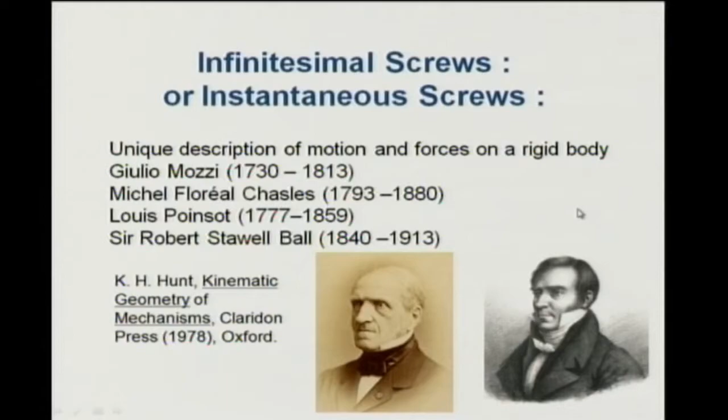So then you can go and find out who these people are. These are very interesting people. They are there in Wikipedia, so you'll read up more on them. They have tremendous contributions to mathematics, including Chasles. All of them, in fact.

You must have heard about Chasles before, right? No? Oh, yeah, earlier lecture. Other than that, in some other course? What did you do in 110? We studied his theorem about 3-dimensional motion, which can be represented as a sum of translation and rotation. Achha, sum of translation and rotation. But they didn't tell you it's about the same axis? No? Oh, that's a loss. But anyway, he lived very long, and he had tremendous contributions.

So now coming back to a line in the plane. You take point 1 somewhere here, point 2 somewhere here, and you have a line going from 1 to 2. So this is a directed line. The component in the x direction, I am calling it L. It's simply x2 minus x1, which can be represented through this determinant. The component in the y direction is y2 minus y1, represented by this determinant. This is just a representation.

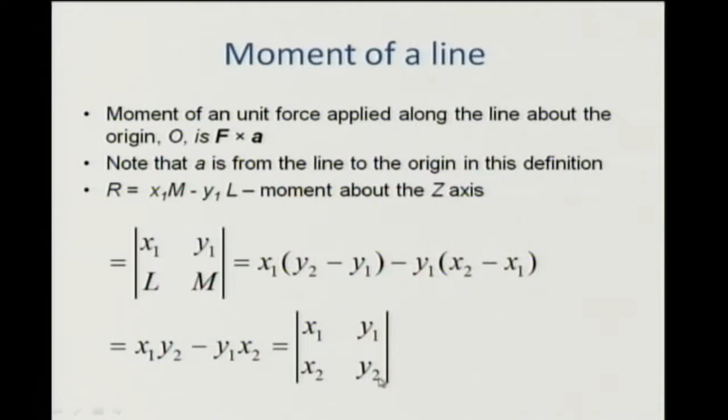So finally, if I now look at this matrix, which is 1 x1, y1, 1 x2, y2. From this I can form three determinants. One is 1 1 x1 x2, which gives me L. I can form 1 y1 1 y2, which gives me M, and then if I take x1 y1 x2 y2, I get R. Okay. So these L, M and R are the coordinates of a line in the plane.

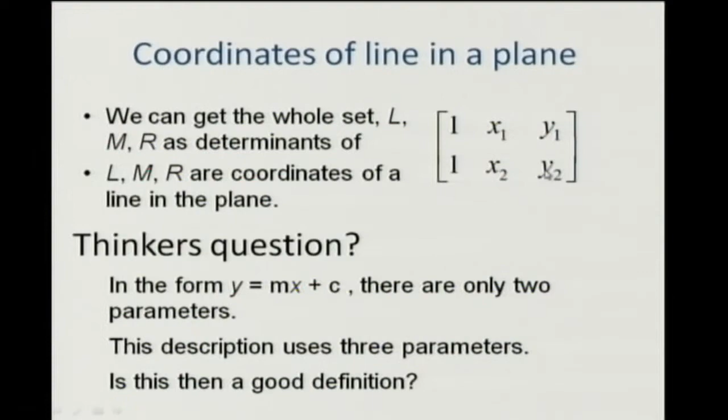Okay. So now what have I achieved? Because if you want to define a line in the plane, the commonest form that you are familiar with is y is equal to mx plus c, right. How many parameters are there? Just two parameters. In this description that I am now giving you, there are three parameters. It's a stupid thing to do, right. But y equals mx plus c was known before. So why am I interested in doing this? Now that's a question which should come to you. If it hasn't come to you, you are not thinking. We will not answer the question now, we will answer it later.

So I want to extend it to 3D. It's very simple, it is 1 x1 y1 z1, 1 x2 y2 z2. How many determinants can I form now? 6, right. How do you get 6? 4C2. So you can form 6 of them. So there are 6 parameters. We've already seen L, M and R. So we define N, P and Q. Okay.

And so you define N like this, and then Q, and then P. And this is an interesting definition. Here you are not using 2 points. This one uses 2 points, right? z1 x1, z2 x2. But this one is z, x and L. So you need only 1 point on the line and just these 2 parameters to define Q. And similarly here, y, z, M and N. So this gives you a 6 parameter definition of a line in space.

What is the equation of a line in space you knew earlier? x by a is equal to y by b is equal to z by c is equal to constant. Plus D equal to 0. How many parameters? 4. Here we have 6 parameters. Not good. So we will see what happens. And so we are looking at this second set of definitions. For any point x, y, z on the line, instead of specific points on the line.

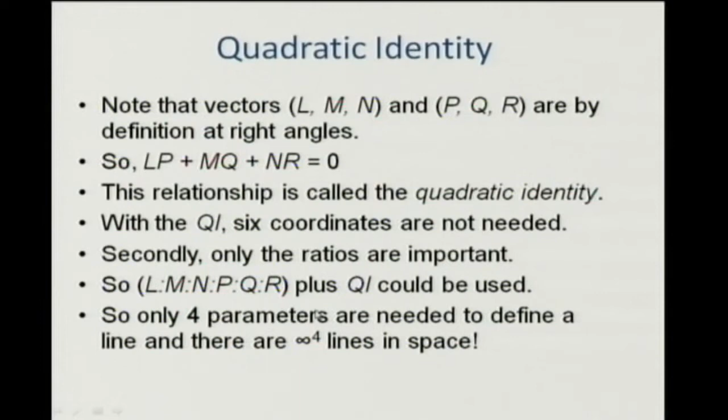And so this is where this thing comes in handy. So you start with the plane z is equal to 0. You could take any plane and do a coordinate transformation and rewrite it, but for simplicity we will start with the plane z is equal to 0. So you take Tx plus Uy plus S is equal to 0, where x and y are the points on the plane. So this defines the full plane.

So what we then do is we scale x and y, we divide by w. I can do scaling because I have this plane here. I can draw a coordinate system and describe all these points in that coordinate system. I can just change the scale of the coordinate system. I still have the same plane. So any point which I had earlier, I will rescale. So I get this formula. Now if I just multiply it by w, I get Tx plus Uy plus Sw equal to 0.

Now this is called homogeneous because all of them have 2 terms. This was not homogeneous. This had 2 terms, this had a single term. So this was a funny equation, this is a regular equation. All your life you have learned the funny equation, but not the regular equation. This regular equation you had to wait for people like Poinsot and Mozzi to figure out.

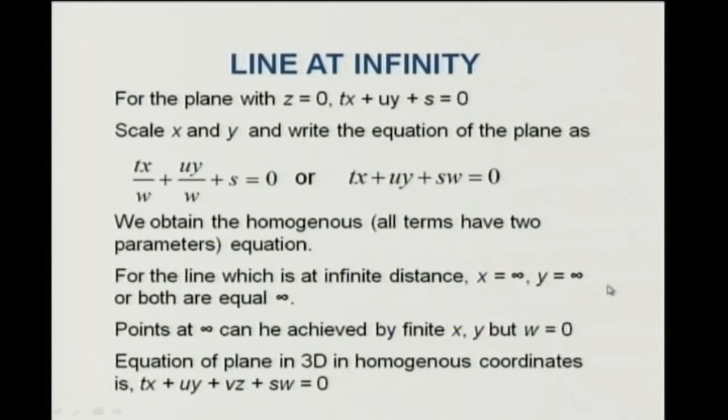So similarly, we take the equation for a plane in 3D homogeneous coordinates, and it becomes Tx plus Uy plus Vz plus Sw equal to 0. So everything has two terms, and you get the equation of the plane in homogeneous coordinates. This represents all points x, y, z, w in a given plane T, U, V, S. So this is a general plane, 3 parameters, or it represents all planes T, U, V, S passing through a given point x, y, z, w.

So the same equation represents two things. This is what is called geometric duality or geometric incidence. And similarly, the join of 2 points, intersection of 2 planes concept that we keep talking about for the line. So we are talking about a plane and a line. Similarly, if we take 2 points, you can again define a line, and that is again geometric duality or incidence.

So if you get w equal to 0, it implies that you have a plane at infinity. So you get points at infinity and planes at infinity all coming through that, and then you can multiply by a constant non-zero scalar and end up in the same plane. So there is no change in the plane. Multiply by any constant scalar, it does not make a difference, you are still in the same plane. Now here is the interesting thing: if it does not make a difference, that is why you keep w by definition equal to 1 unless you want the point at infinity.

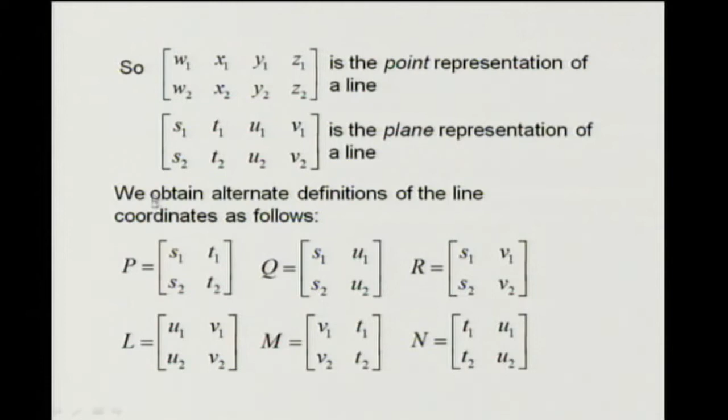Okay. So which are again the same matrices from S1 T1, S1 U1, SV, and then similarly U1 V1. It is very similar, except that these orders are reversed. L, M, N, P, Q, R are called the Plucker coordinates; this is called the ray coordinate order, which is basically a join of 2 points, so there is a sense of direction. And then there is axis coordinate order, which is the intersection of 2 planes which gives you an axis. It does not give you a ray, it is not directed, and that is P, Q, R, L, M and N.

Okay. And finally, if the line is not at infinity, W is usually taken as 1. For the line at infinity, we said W is equal to 0. So the whole matrix becomes this form. For W equal to 0, L, M and N are definitely equal to 0, but P, Q and R are not necessarily equal to 0. So we have a moment of a 0 force. It's an interesting concept, because we started by defining that if I have a line and I take a moment, now we have 0 force but a finite moment.

Possible? In statics? Come on, you have seen this, right? It's called a pure couple. It's not so bad, right? A couple has 0 force but a finite moment. But in general, if you apply a force, then about a point it will have moment and a force. So it is not so unusual. Okay. So what will slowly come through is that you can have 0 force but a finite moment, and that is essentially something at infinity, a line at infinity. Okay.

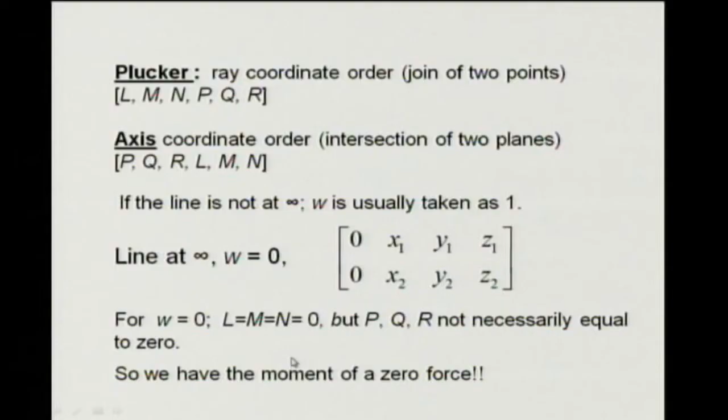So similarly, if you are rotating about a line at infinity, then you get pure translation velocity, so that is like a sliding joint. Now this is something which you have already done in the kinematics course. Yes, no? This you must have done. If you say no, then you should have flunked the basic kinematics course, right? If you have a rotation axis at infinity, you get a sliding joint. So this is the same representation of that.

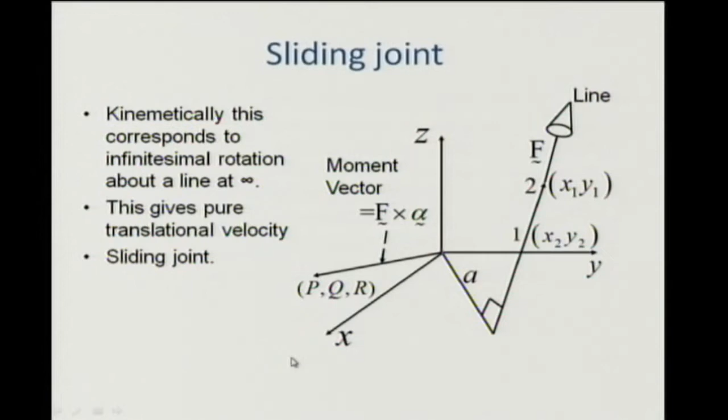Yeah? You remember? Or don't remember? Remember, vaguely.

So now one of the problems which you struggle with is that you always keep talking about force and a moment about a point. So you talk about a pair. Now if you write it in the form of a screw, then you get a unique description. It doesn't matter which point you are referring to, it is unique in the coordinate system which is used. So we look at that.

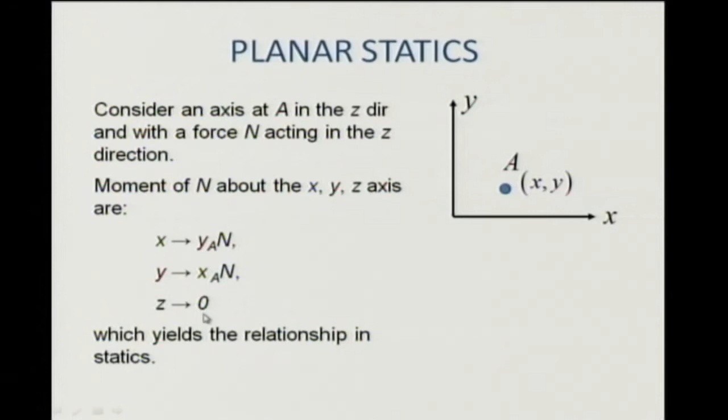Now similarly, if you have a body rotating with angular velocity omega about a point A, and you take a point D which is instantaneously coincident with the origin of the coordinate system. Since this is rotating, there is no point D which always stays at the origin, that is acceptable. The point instantaneously coincident with the origin will keep changing, but I take the point D which is instantaneously there. So the velocity of D is omega cross AD.

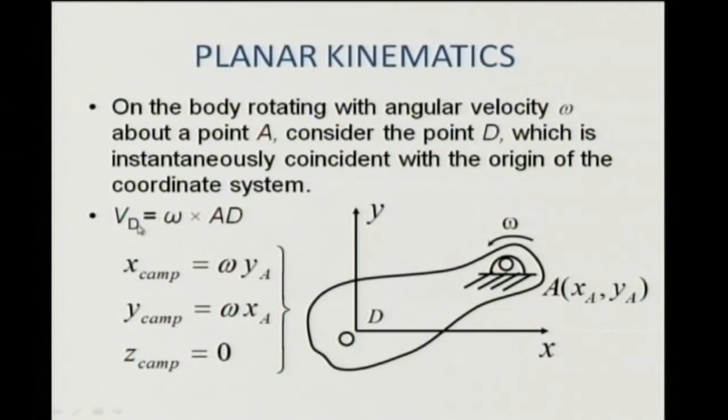So the x component is omega ya, y component is omega xa, and the z component is 0. So these are identical relationships which hold. So we now extend to a slightly bigger thing.

Now we have the general line in space, LMN PQR, and we have a body rotating about it. Now this body, if I look in the extended sense, can extend it and curl around this, and we will have a point on this body which is coincident with the origin. Not a very big stretch, right? You can just imagine if I just draw this like this, it will just clutter up the picture, but it will get me there.

So if I have an omega about this, then the velocity components about a point which is coincident with the origin will have components p, q and r. Okay. And the velocity at any general point x, y, z is p minus this, q minus this, and r minus this matrix. Okay. You should just try proving this. It's not very difficult. It's a little bit of homework.

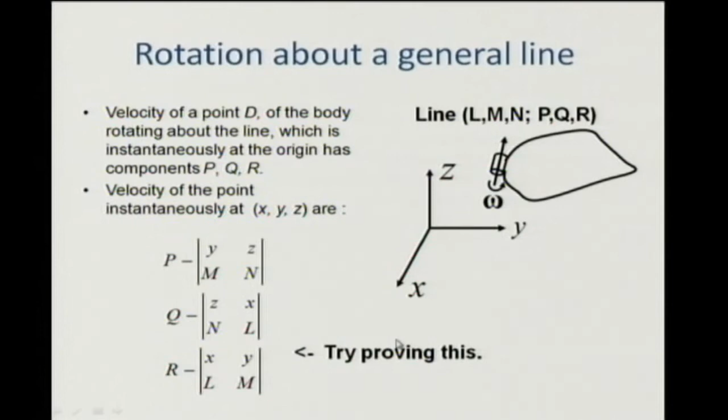Okay. So PQR is for a point which is instantaneously coincident with the origin. If you take a general point, then you get this. You have to add something more to it. Okay, you should be able to prove this very simply. Okay, clear?

So now let's look at other nice properties. Obviously, two lines are parallel if L is to M is to N is the same between the two lines. Okay, and two lines are perpendicular to each other, they need not intersect, but they're perpendicular to each other if L1 L2 plus M1 M2 plus N1 N2 is equal to 0. Okay, very simple. Dot product is equal to 0.

For two lines to intersect, essentially it means that they have zero mutual moment. That means if you apply a force about one and it's free to rotate about the other, then you get a zero moment. So then you get L1P2 plus M1Q2 plus N1R2 plus, so L M N P Q R of the first, and then you write P Q R and then L M N of the second, is equal to 0. So you write one in ray order and the other in axis order and take the dot product and you get this equal to 0. Okay, so this is the zero mutual moment condition.

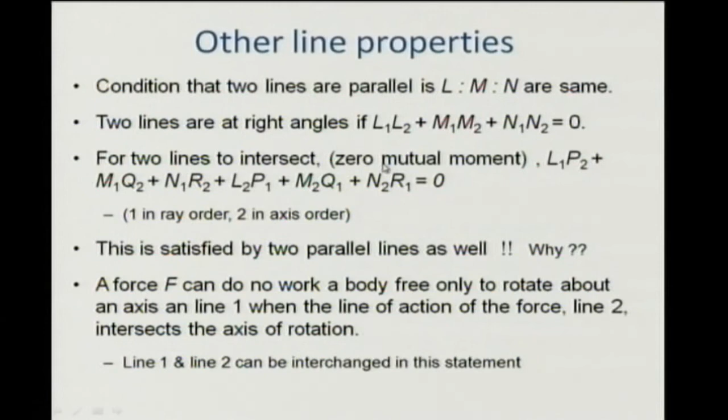We now look at this issue of normalization. So very simply, you divide all coordinates by L square plus M square plus N square raised to the power half. So depending on the distance, p square plus q square plus r square has a value. Now, if L, M, N all are 0, then you divide the coordinates by p square plus q square plus r square raised to the power half.

Okay. Now, angle alpha between two normalized lines, not general lines, so you normalize it first. So cos alpha is given by L1 L2 plus M1 M2 plus N1 N2, and then sin alpha is given by this expression. Now there is a square root; I just take the positive value of this. I always take the positive value, not the negative value of the square root.

And the perpendicular distance between two lines is minus L1 P2 plus M1 Q2 by sin alpha, and when the lines intersect, this perpendicular distance goes to 0. Okay. So this is the normalization procedure for the line equation.

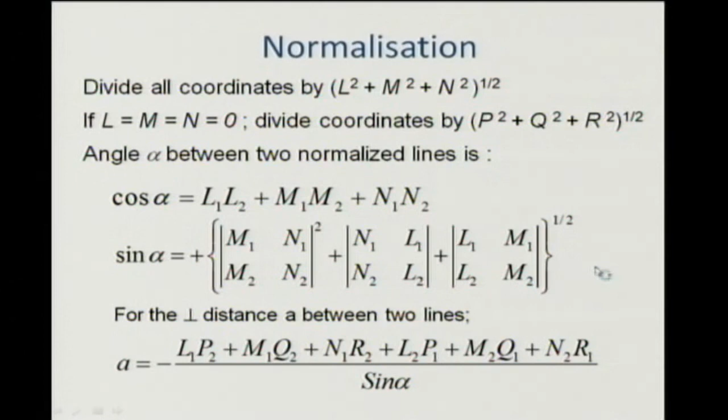And finally, we will get to this, and we will push on this more in tomorrow's lecture, is screws. So we will deal with screws, motors and wrenches, which you cannot find in a hardware store. We have already seen new kinds of screws, right? Mathematical screws, 6 things put together. So the definition is that you take a line. Now a line is essentially, we said, 4 parameters, right? 6 parameters linked with the quadratic identity and the fact that only the ratios are important.

So then you attach a scalar pitch parameter h of dimension length. If you do that, then you are left with infinity to the 5 screws in space and 1 infinity of screws on a given line, because that parameter h can take any value: 0, positive, negative or infinite. So that is all you are doing. You take a line and I just assign another parameter to it, of dimension length.

So we are still not talking about the geometry which comes out of it, because I said a line is LMN PQR with the quadratic identity and the fact that there are ratios. If I normalize it, then the ratio thing is anyway gone, with the quadratic identity. Now with that, if I tag on another parameter h, I get what is called a screw. So I am leaving the definition vague and open like this; it is just a mathematical definition in terms of number of parameters. So we will take it forward based on this.

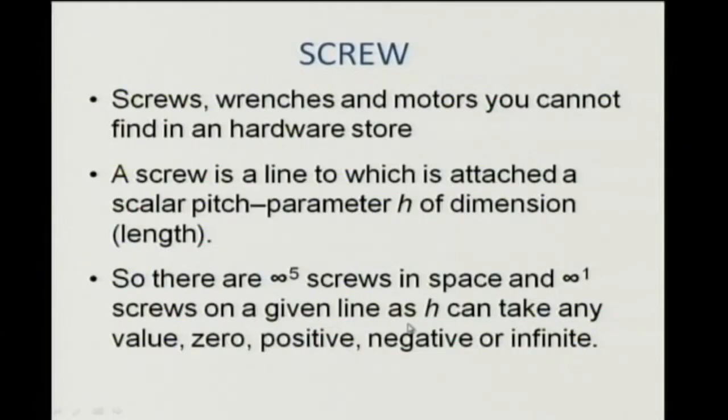So in tomorrow's lecture we will find out how it matters and how, using just this single parameter h, we can define both motion in 3D and the force moment system in 3D uniquely, and what are its properties. And the whole idea is that we are going to derive the Jacobian of a big manipulator, not the little one which you have gotten in the assignment, which you people have still not solved so far. Alright, so we will stop here today.